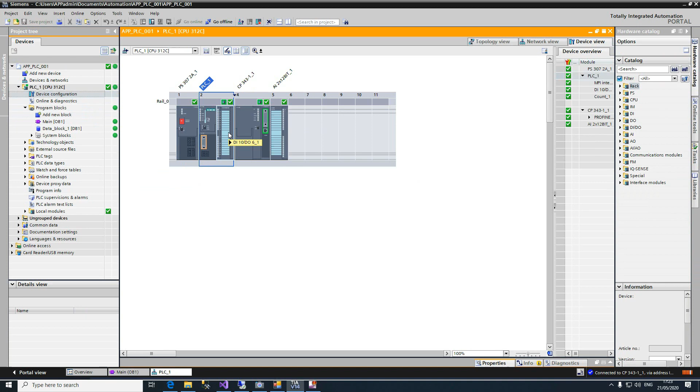So in TIA, when you go into device configuration, it's important obviously that you set up your PLC to be the same as the actual physical hardware you have there. We'll go into the actual card. So in the card, it's important that you note down what is the I/O address. And then when you actually go into the channel, that you set it to be as per how you've set it from the hardware side, right?

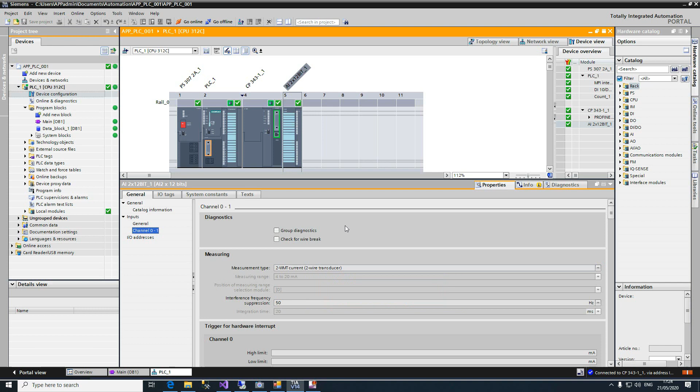So there's actually a physical switch where you can put down again 0 to 10 volts, 0 to 5 volts, PT100 directly, or a 4 to 20 milliamp signal as we actually have in this case here. So that's very important to note and to remember. So in terms of actually scaling, we have an example here in ladder of a scale block. In Simatic Manager, there is a specific scaling block that other automation engineers would use called an FC105. In this case here, this is literally just called a scale block.

Okay, so what goes into it? What goes into it is the actual I/O itself. And then you put in the different limits. So you put in the high limit and the low limit. Again, 150 and minus 50.

In terms of what you get out, it's important that you actually put a real value, right? So in this case, what we have is something called a data block, which we use in the same way as Simatic Manager for anyone who has experience. We set up our variables there to have everything held. And there's something very, very important that I'm going to point out, in particular for anyone who's been involved in the migration of Simatic Manager and TIA.

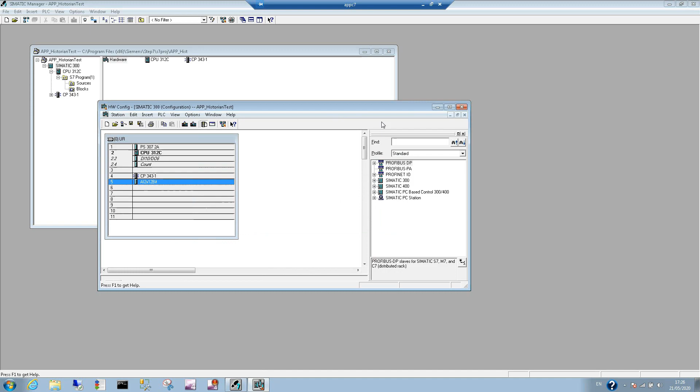When you go into the actual hardware, so I'll just click down here. So when you go into the hardware, you'll see that there's an address, an input, essentially where you see it's PIW. Sorry, I need to go down to something called the symbol table. So you'll see PIW 272. Okay, so if you remember that PIW 272, and then if we go back to Simatic Manager, the symbol table

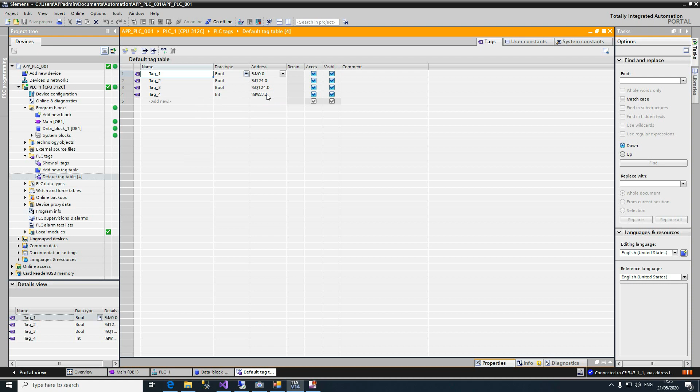equivalent is effectively this PLC tag table. And when you're actually putting in the tags, you'll see this concept of IW272. This can cause enormous confusion. It's one of those slight differences. So when you are inside your scaling point, what you have to put down is IW, then the address, in this case 272:P, and then that is the equivalent. That is something that has caused enormous issues in the migration between Simatic Manager and TIA. So it's just very, very important to note that.

Okay, so what I'm going to do then is I'm just going to go live. I'm actually online to the PLC. So in TIA, I can see that this guy is 21 degrees. What I'm going to do is just put in this camera here. Okay, so you can see the value in real time.

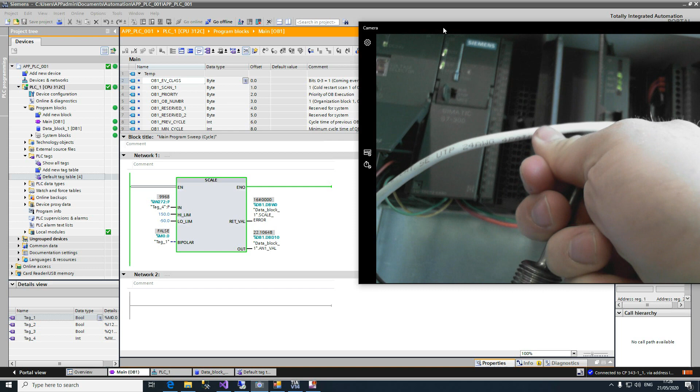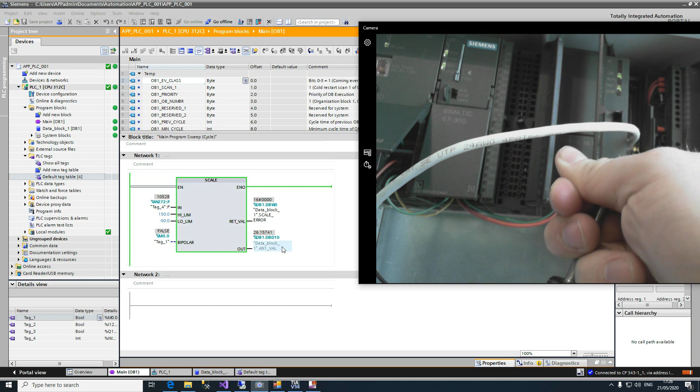And here I'm just going to hold this in my hands, and what we're seeing then is the actual value is going up. So you can see that there's data block AN1 val, and just by the temperature in my hand, I think our temperature goes up to kind of the mid 30s. So basically the room temperature here is about 21 degrees. Okay, so that guy is live in itself.

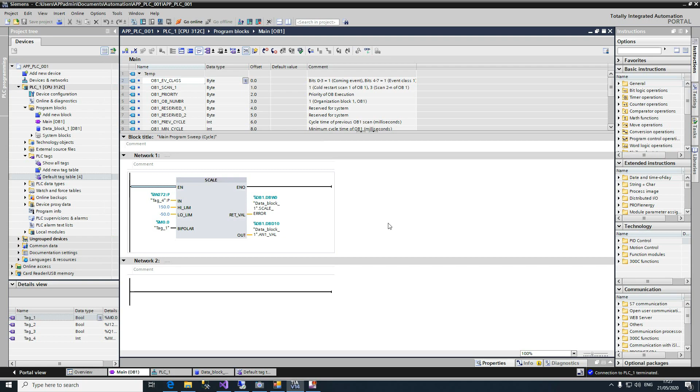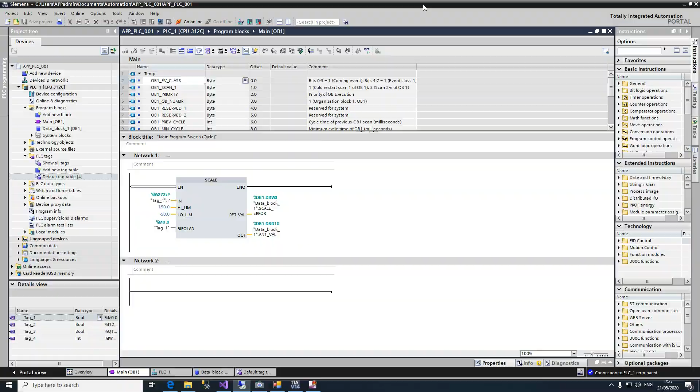Okay, so the next thing for me to do then is just to go into Simatic Manager and just point out a number of differences that you'll see, just to kind of wrap it up very quickly. So inside Simatic Manager, when you go into your hardware, again, it's very much the same. When you click into it, the addresses, etc., and what you put in. Here, what you'll see is the measuring type 2D-MU. And when you go into TIA, the other aspect is that you'll see this 2 WMT. It can be slightly confusing, but again, it's important to note those slight differences.

Okay, so in terms of, sorry, just one moment there now. So in terms of the setup that is being shown, basically the transmitter is just something that we've used as an example in this case. So the request for this video was just to do a demo of an analog input. There's many videos that you can find with a focus on just how to do it in the software, but the wiring is very, very important. Again, the setting has to be correct on the physical card itself. Then in the software, it's extremely important that you select the correct input type.